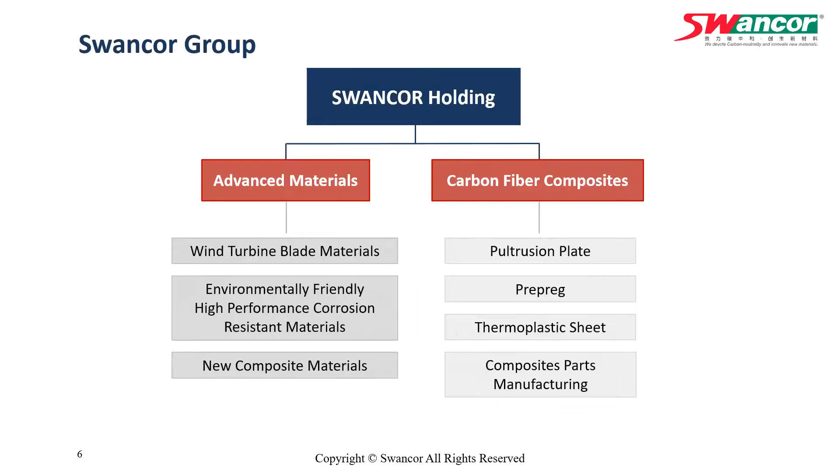First, I would like to announce Swancor is turning 30 years old this year. And Swancor Advanced Material was listed on the stock market in 2020, last year.

We also have 2 integrations. The first is Meijia, where we formed a strategic alliance and acquired about 23.8% of its company shares, securing access to upstream epoxy raw materials. The second acquisition is COTECH, a carbon fiber composite manufacturer, for applications in aerospace, automotive, and military.

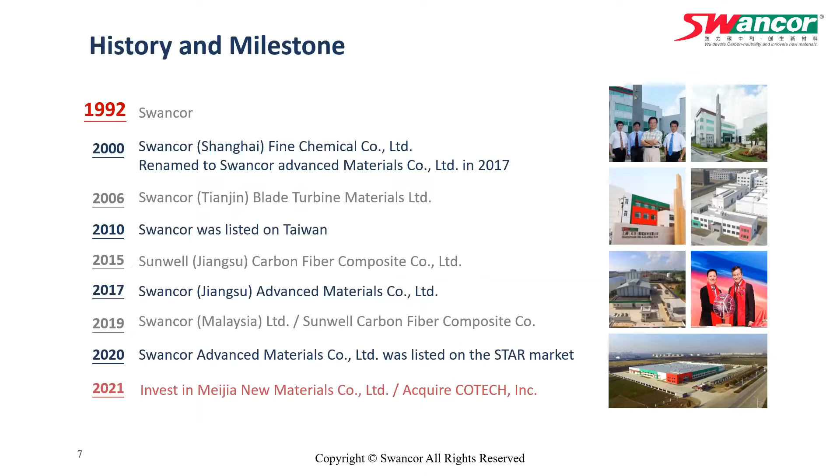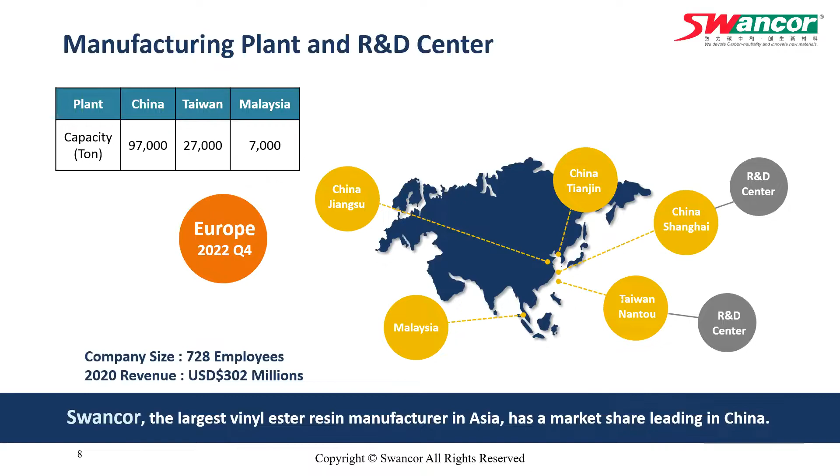Swancor has 5 manufacturing sites in Asia, indicated in yellow color, and 2 R&D centers. Our European production is expected to be online by the end of this year in Q4. Current company profile: about 728 employees, and 2020 revenue of about $302 million US. Total capacity is about 131,000 metric tons, making us the largest vinyl ester manufacturer in Asia.

Swancor products started from offering corrosion resistant resins and extended into wind turbine blade technologies. HYVER resins play a very important role here in building larger wind turbine blades. Swancor also offers flame retardant epoxy resins that meet the EN 45545-2 standards.

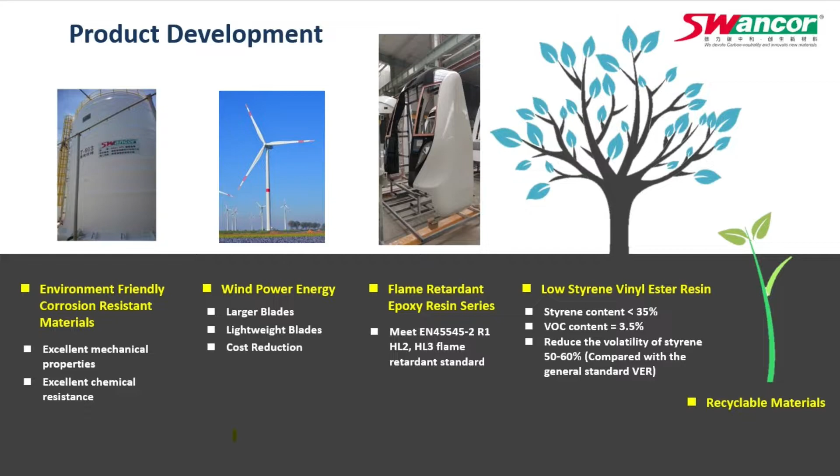In the effort of environmental friendliness and addressing VOC issues, Swancor makes it available for our customers to select lower styrene content in the vinyl ester resins, minimizing it to less than 35%. We are committed to a better sustainable future for mankind. Our next effort is to make degradable resins available so they can be truly recyclable.

Regarding Swancor Group's ESG, our ESG committee was established in 2015, and ever since we've been receiving Taiwan Enterprise Sustainability Awards for 7 years in a row. Swancor is also recognized as 17th in the Growth Top 100 Taiwanese Enterprise for 2021 by Commonwealth Magazine, and top 50 Taiwanese enterprise on carbon reduction.

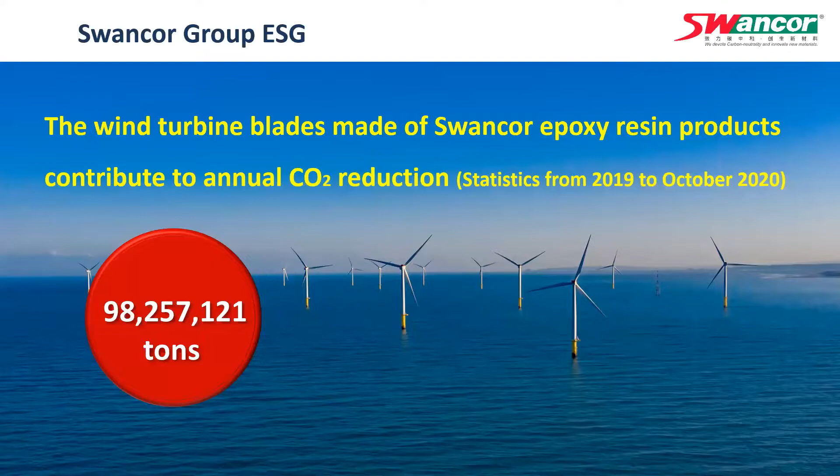Talking about carbon reductions, this page illustrates how seriously committed we are to carbon reduction and the important role we play in this industry. We are proud that our resins were used to produce wind turbine blades that achieved CO2 reductions of more than 98 million tons between 2019 and October 2020.

This year we launched our new company slogan: we devote to carbon neutrality and innovate new materials, just like the previous page. This is our brand promise, and we mean it. That's about the updates.

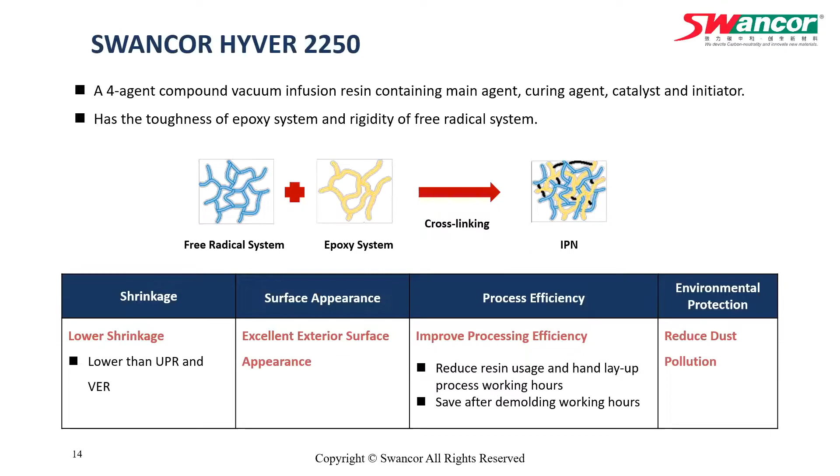And finally, the surface treatment gets much less polluted with dust. So we can say SWANCOR HYVER 2250 is a working-environment friendly product.

From this slide, we'll show you some technical issues for SWANCOR HYVER 2250. First is radical modified vacuum infusion resin with lower viscosity, long gel time, and lower shrinkage compared to UPR and VER. It's suited for any kind of large structural product with infusion process. It has good adhesion with UPR gel coat and good wettability with glass and carbon fiber.

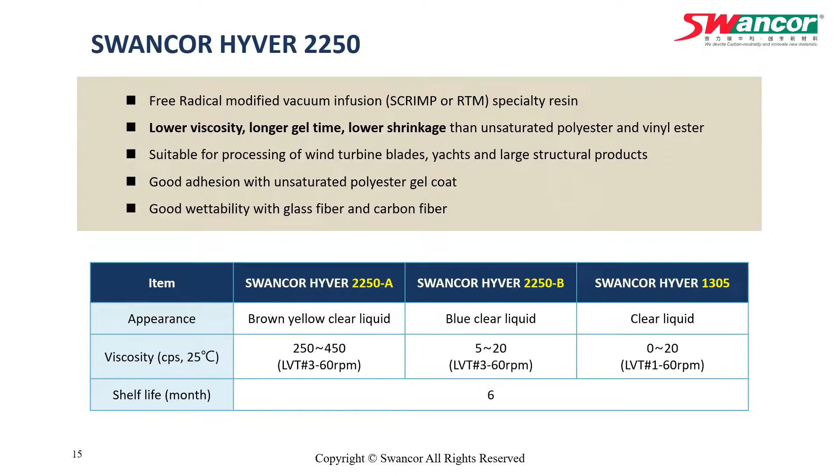From this table, we show the appearance and viscosity for three or four components. The first one is the gel time table. We designed the operating condition from 20 to 35 degrees Celsius, which suits for most cases globally. Meanwhile, it's resilient with specific components of SWANCOR HYVER.

1305 as catalyst at 0.1, 0.3, 0.5, and 0.7 respectively. And that's all can meet the pot life longer than 60 minutes.

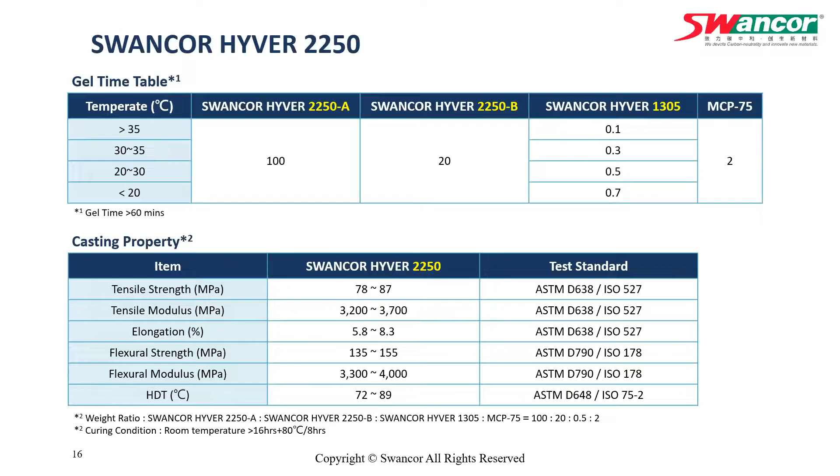And the second table is about the casting property with tensile, flexural, and HDT, shown in this table. SWANCOR HYVER 2250 already gets DNV approval, meaning the mechanical properties can fit the requirements of the yacht and boat industry. SWANCOR HYVER 2250 had research and development for a few years.

During this period, SWANCOR got deep cooperation with Atech Composites, sharing mutual resources and support with each other. Today, fortunately, we invite Atech Composite representative Jack Hong to introduce the application case, showing more concrete and specific results. Jack, now it's your turn.

Thank you, Mengting. Greetings, ladies and gentlemen. My name is Jack Hong from Atech Composite Engineering Department. I'm so excited to participate in this online conference because today I'm going to share two important things with you. The first is our application experience of HYVER resin in composite yacht building. The second is the advantage we have learned from the application.

As an experienced composite manufacturer, we believe that if we make the composite part look good, it is good. Surface appearance is one of the most important items for quality evaluation in the yacht industry. So having a nice surface is one of the measures to attract buyers to buy our boat. I'm proud that Atech is a professional composite manufacturer and is quite skilled in infusion process.

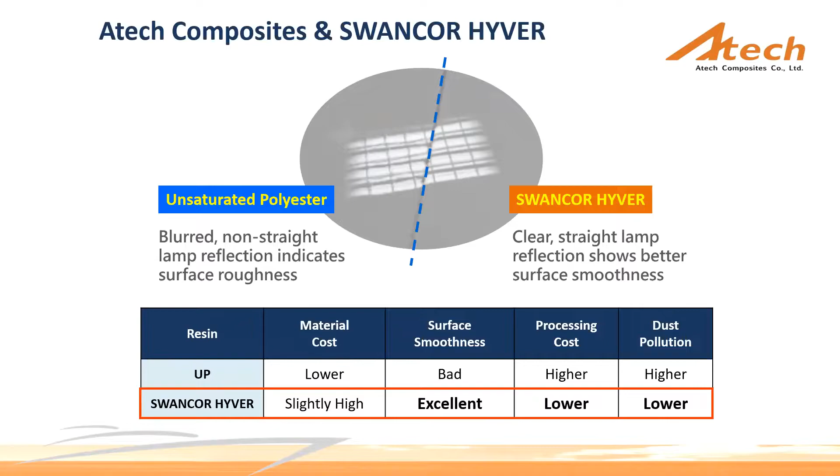Let's take a look at the photos in this slide. These are the test panels we made for HYVER resin testing. We would like to make a comparison between HYVER and unsaturated polyester. As you can see, the test panel made with HYVER has a better surface. The surface is clearer, and the reflection is straighter than the test panel made with unsaturated polyester. So my opinion is that the first advantage of HYVER is lower shrinkage and better looking.

But some people may say using unsaturated polyester can build a boat which also has a nice surface. Honestly, they are right, because we did it with the same idea before HYVER application. In order to block the fiber or the grooving pattern from being printed on the surface, builders always lay up a skin coat after spraying the gel coat. Generally, the skin coat is made by hand lamination and it is a resin-rich layer and it is always thick. The builder would build a thick skin coat to block the print-through phenomenon.

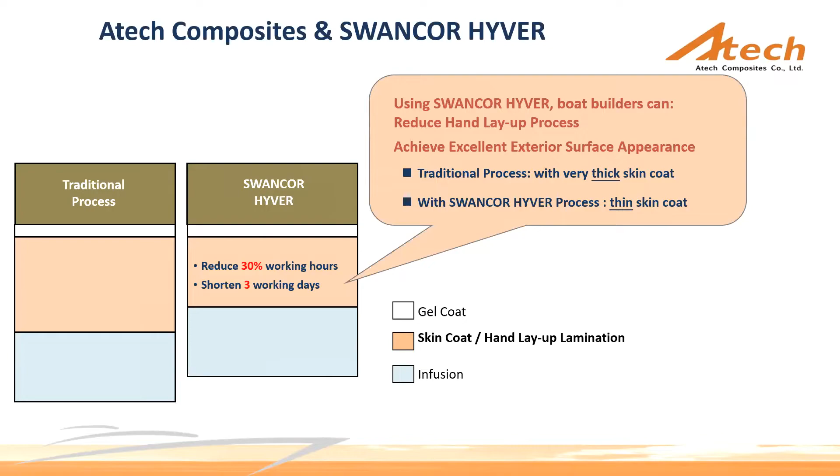For luxury yacht, hand lamination is necessary, but it is really time-consuming. By using HYVER resin, we can save labor hours and construction days in the hand lamination stage, while keeping the same surface quality.

Also, in some cases, the builder built the boat by infusion process, but the skin coat is thin. So after demolding, we usually see a really bad surface, and these builders need to do surface fairing work to eliminate it. The main process to eliminate the pattern is always rough grinding and grinding the gel coat surface.

After grinding the gel coat, if the builders find that gel coat coverage is not enough, they have to respray the gel coat. After respraying, they also need to do rough grinding and soft sanding work. During the rough grinding process, lots of dust and particles will be scattered in the factory.

HYVER helps us get a better surface, so only soft sanding or wet sanding is necessary. We save labor hours on fairing work, and we also create a better environment for our technicians.

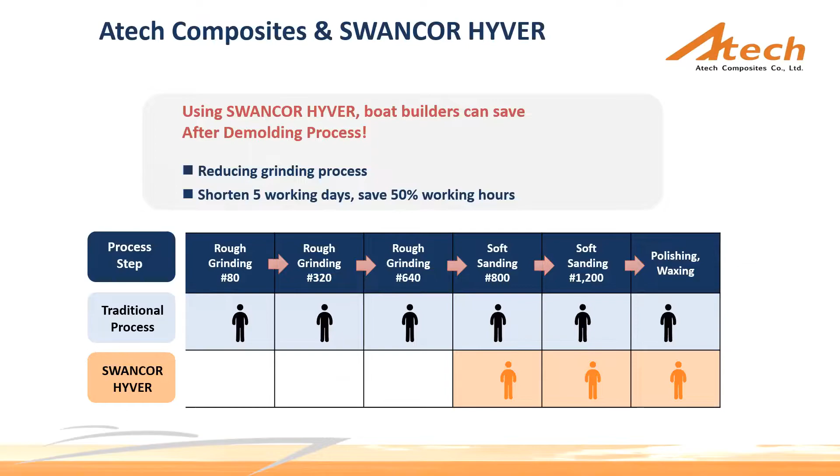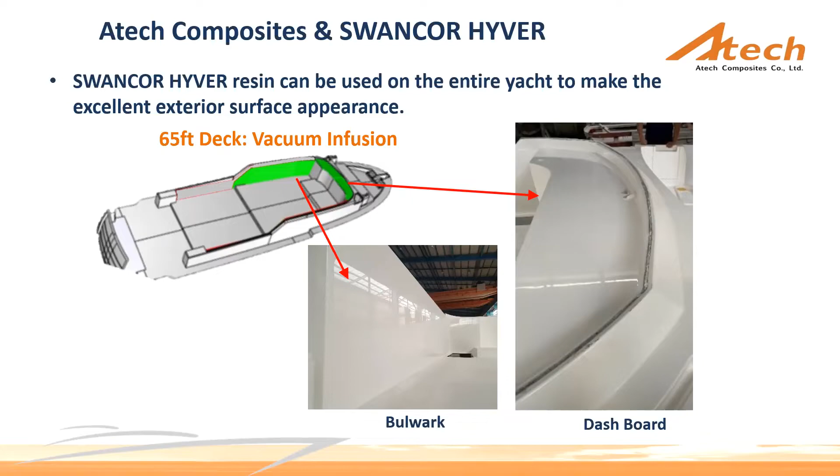The picture I took is the bulwark and the dashboard, because they are high visibility areas and the surface appearance is really critical. After demolding, we found the reflections from this area were straight and clear. At that time, we were more confident with HYVER resin.

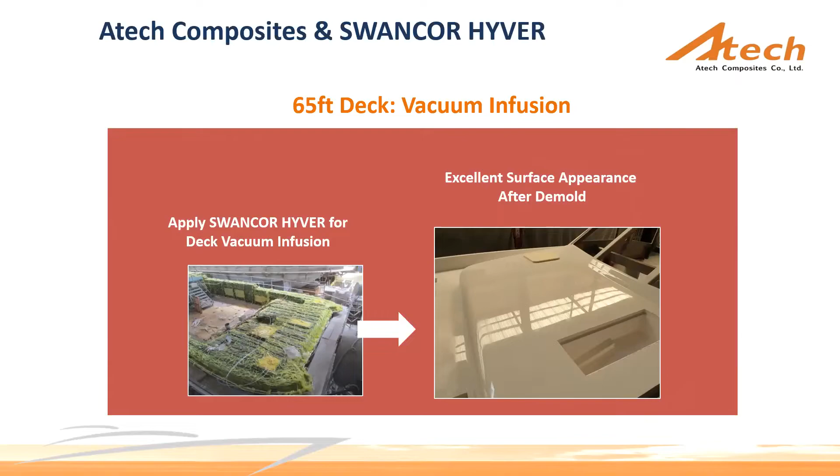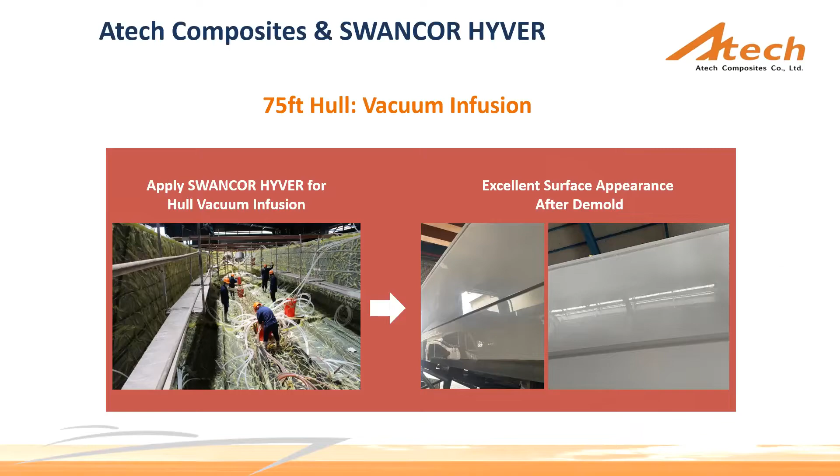Swancor and Atech integrated the material and the process together and applied for patents in China and Taiwan. With our efforts and cooperation, it is now a patented technology.

Based on my application experience, here are my brief conclusions. The first one is HYVER has lower shrinkage, which makes the surface look better. The second one is we save labor hours and have less pollution in our factory.

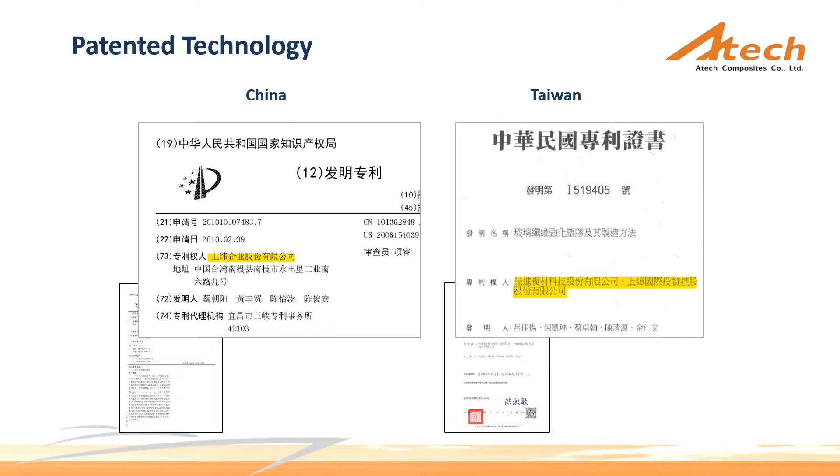Thanks for the sharing from Jack. It is very impressive that SWANCOR HYVER can make such an improvement to the working efficiency and also the environment, because of the less shrinkage and better surface performance.

So I think everyone also wants to know how to implement HYVER at your or your customer's site. Here I would like to share the implementation diagram that can make the evaluation process go more smoothly.

First of all, I want to mention that although SWANCOR HYVER is a different concept product compared with existing two-component type resin, customers can still evaluate it with their existing equipment, because our target customer of HYVER is the shipyard that already manufactures their product with the vacuum assist infusion process, such as SCRIMP, VIP, or VARTM.

So Swancor will provide a manufacturing guideline with technical information and practical onboard testing data to you, so you can check whether you or your customer has this equipment or not.

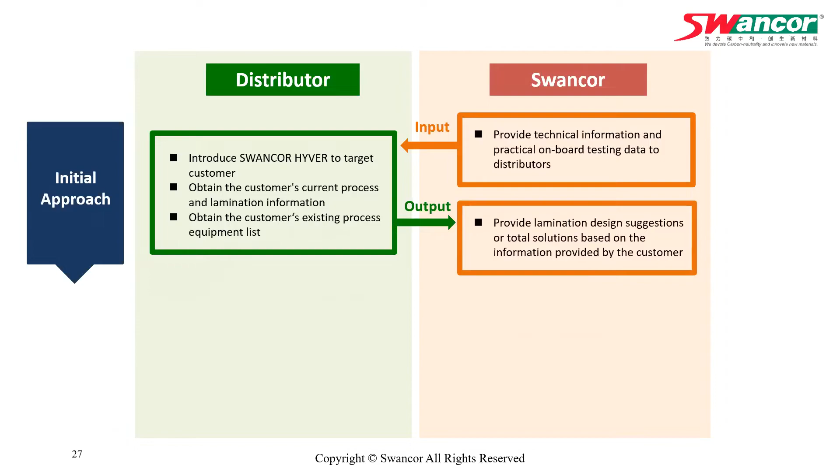It will cost more time to test if we cannot get sufficient information, so please help us provide as much data as you can.

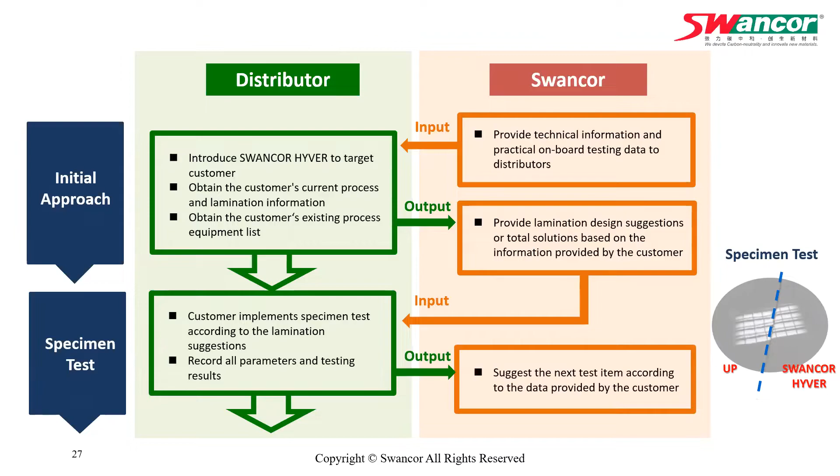At first, we recommend you evaluate our product with a small specimen based on the design we propose. In this stage, you can get more familiar with the manufacturing process of HYVER, and also see the difference between UP and HYVER, just like the picture on the right side. Our technical service team can then optimize the parameters based on the results you record, and provide better parameters for further evaluation.

If we get the optimized process parameter in the specimen test, you can conduct the trial production from small parts first, such as the hardtop or the radar arch, and then move to large parts, such as the bulwark and hull. It is very important that we need you to record the process parameter and the result, so we can discuss with you and then tune the parameter to meet your requirement in each part.

It will take several iterations to get the best result in every part. And also, meanwhile, you can build up your own database about how to manufacture your product with HYVER, and it will be very helpful in the future mass production.

Finally, you can start to conduct the practical onboard testing based on what we get in the previous trial production stage. Our technical staff will still keep on providing any information you need when you have any problem during the mass production. This is what we get and learn how to implement HYVER into customer site.

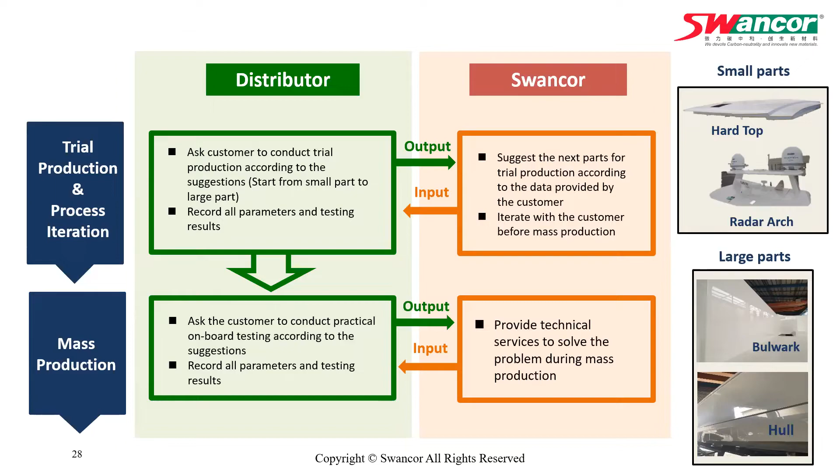Although it may have many steps to do, I believe it is very worthy to improve your process efficiency and also the working environment with our SWANCOR HYVER. Yeah, and this is my part. I would like to pass it back to Stephen.

Thank you, Jackson. So in summary, SWANCOR HYVER technology is designed for vacuum infusion process. And the ideal applications are making boats and large composite parts fabrications.

And the major benefits of SWANCOR HYVER resins is lower shrinkage rates, and that improves the lamination processing time by up to 30% working hours reduction. And the post-treatment process can be reduced up to 50% of the grinding time hours as well.

As our topic focus today is the marine industry, the ideal customer is the shipyards with existing vacuum infusion process in place. So for implementing these HYVER technologies, as shown in Jackson's introduction diagram, it is essential to understand your production parameters. So when we make our recommendations, we can be more precise, and that can help you shorten your development as well. So that's our HYVER webinar today.

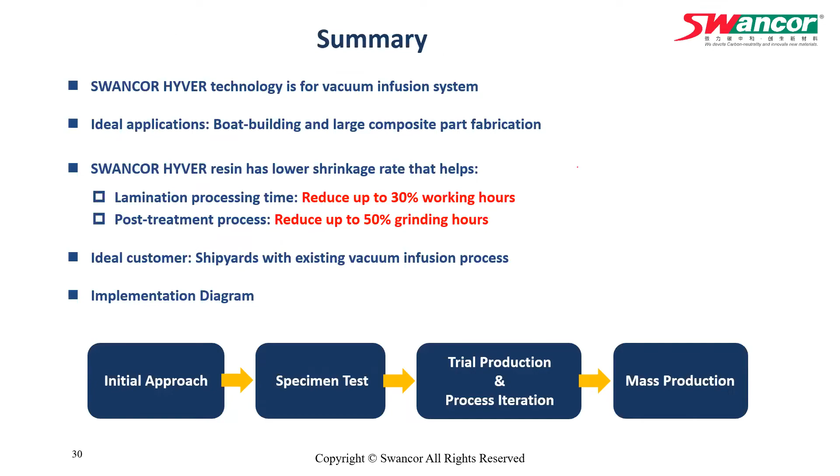Okay, let's start with the Q&A section. I have two similar questions that were registered when you signed up, from Chris and Sean. The question is asking to understand the benefits versus the competition and also the benefits of using HYVER resins.

In response to this question, HYVER 2250 has lower shrinkage rate and lower VOC than the vinyl ester and UP resins. That translates to less VOC during production and lower surface shrinkage rate, resulting in better surface quality. The better surface quality effectively reduces the post-processing grinding costs and labor, and that also reduces the dust pollution on site as well.

I have a question asking about the equipment requirements for using HYVER. Jack, do you want to reply to this one? He's asking about the customer's capability, capacity, or related equipment needed to use HYVER. You have the first experience.